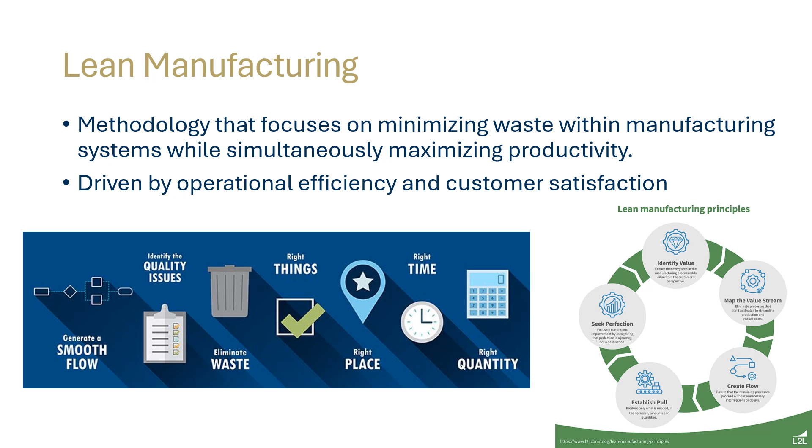The first topic is lean manufacturing, which is a methodology for both business and industry that focuses on minimizing waste within manufacturing systems while simultaneously maximizing productivity. This is driven by operational efficiency and customer satisfaction. Basically, how can we be as efficient as possible and provide as much customer satisfaction? This goes into principles of figuring out what is valuable, how can we get the value, how are we going to make that value flow as efficient as possible, figure out where to set those up to be efficient, and then continuously improve.

For applications, this can apply to any industry, especially in the business and manufacturing sector. I'll be focused on the manufacturing sector mostly. It goes into automation, the continuous improvement mentality, and flexibility. Basically, can we rotate as efficiently?

Then we'll go to production flow, because of how lean manufacturing works, there has to be a lot of controllers and advanced systems to maximize the efficiency. So it has to adjust its flow to maximize how effective it is per section. And then supplier relationships - are we going to have a port nearby? Are you going to be able to ship them efficiently and effectively and cost effectively?

One easy example of that is a car manufacturing plant where they actually roll down the vehicle being made on an assembly line, and a lot of that is automated or assisted where it's always moving, so it's always keeping this production flow going and moving at all times.

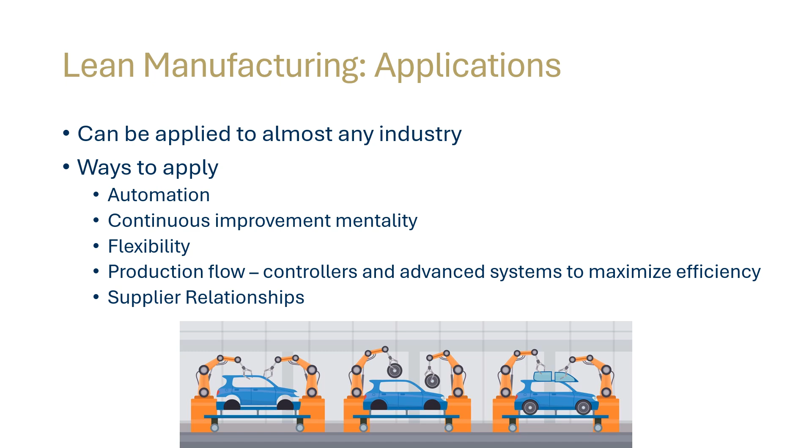Some of the capabilities or pros of lean manufacturing: it reduces lead times, it reduces operating costs, it improves product quality, and it simplifies process or tools.

One of the main parts of lean manufacturing is, well, you're leaning out the manufacturing. How little parts, resources, people do you need? How efficient can you make the process of manufacturing? So your goal is to use as little as possible.

However, that also comes with problems in the future where you could hinder future development because you might not have tools to change a lot, or you have small error margins because you don't have all these extra fail safes due to having a lean and not as robust manufacturing process. So your failures could stop the entire system, and it could really slow the assembly line when the manufacturing breaks down, like a tool breaks or something like that.

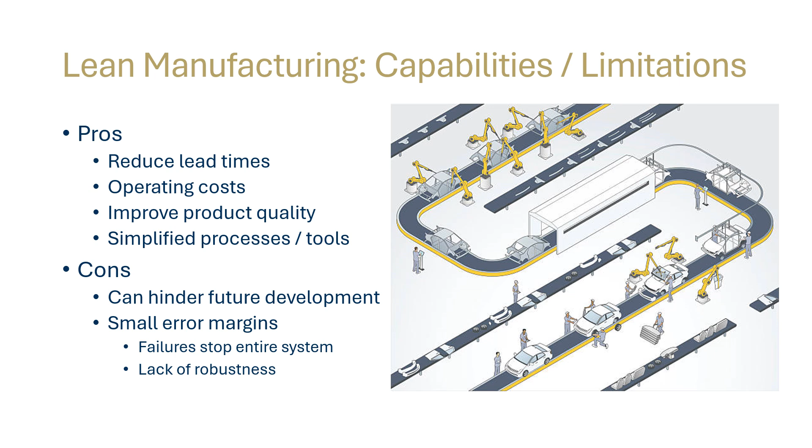Why I like lean manufacturing is it really reminds me of this game I play that's all about efficiency and maximizing resources, resource management. It's a fun game, but it's a lot about how you're going to gather these resources, how you're going to ship it to a place that's going to manufacture it as effectively as possible to complete the end goal of manufacturing. It's not about selling it, but it's a lot about resource management, how you're going to move it, and operating times. That kind of got me into engineering, and the lean manufacturing idea really resonated with the same reason why I enjoyed this game.

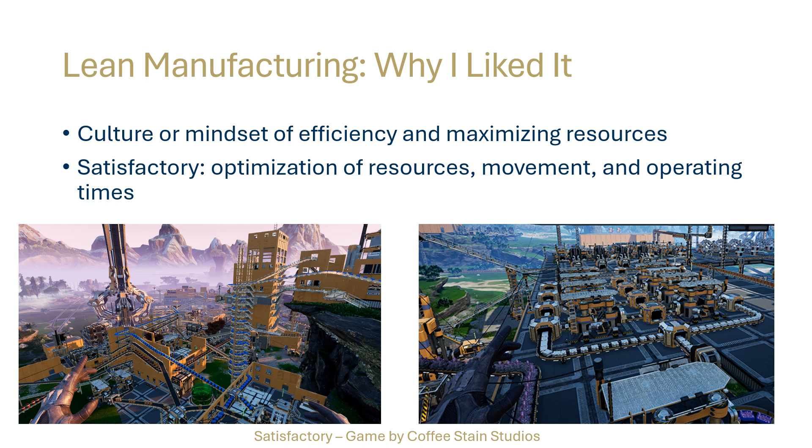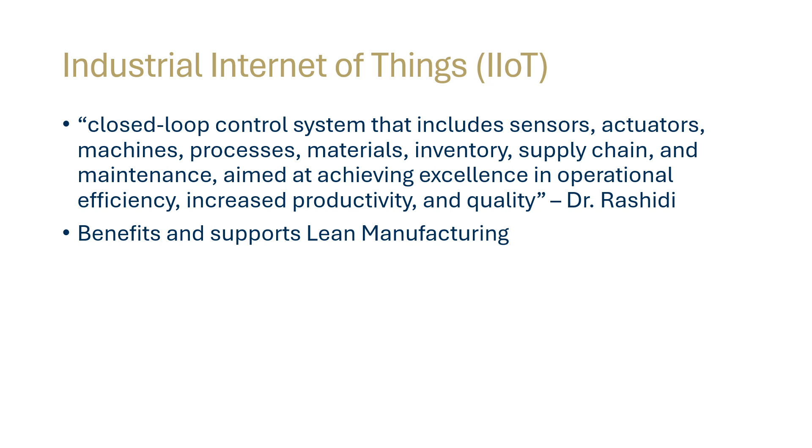A good segue from lean manufacturing is the industrial Internet of Things, IIoT, and it pretty much supports and benefits lean manufacturing, so it's not too far off. It's a closed loop system that basically includes sensors and a bunch of other machines, process, materials, supply chain maintenance, all about just increasing the operational efficiency and productivity, quality of the manufacturing system.

The biggest application of the industrial Internet of Things is just automation, and this includes at the plant and out of the plant. This is the entire product life cycle of almost anything being manufactured that could benefit from this. Basically, ground to raw materials all the way up to the customer can be optimized.

That's why industrial engineering is such a big field right now - it's all about optimizing from where the resource is going to the plant, to how efficiently the plant moves it, to how efficiently you can deliver it, and all this stuff that allows you to just be efficient from start to finish.

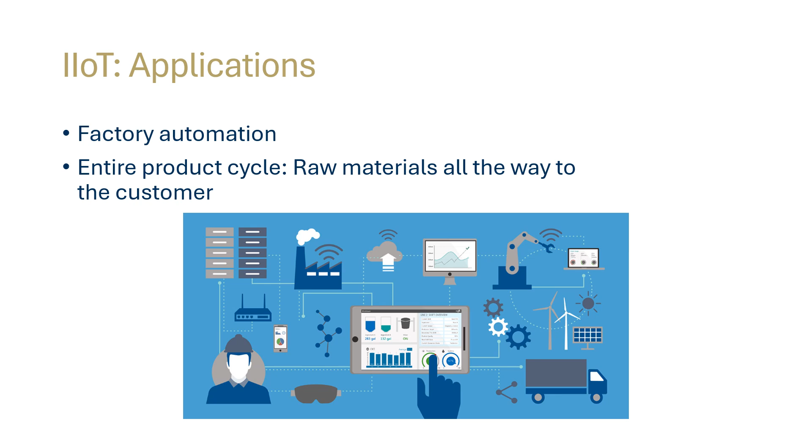For capabilities and limitations, capabilities are using the industrial Internet of Things, basically hooking up to the cloud. You have real-time monitoring, data collection, analysis, decision making. It can predict maintenance because it's watching how much it does. So if you're running it, you basically have to set up an algorithm like every 100 hours this tool will probably need to be replaced. Then you can maintain it before something breaks.

So instead of the whole line failing because a part broke already, you're just swapping it. This also bleeds into automation, where it allows you to run continuously. And then also, because of automation, you're allowed to do remote control, which means you can do lights-out conditions where basically there's no people there or very limited, just a skeleton crew to keep it running. Or you can have manufacturing in hazardous or dangerous conditions that humans would not be able to easily perform in.

Some limitations of the industrial Internet of Things is cyber attack risks. Some of the dams and systems are always under attack. I think one of the dams in the West gets almost 100,000 cyber attacks a day. So there's a lot of risks. If that fails, it could cause a lot of problems.

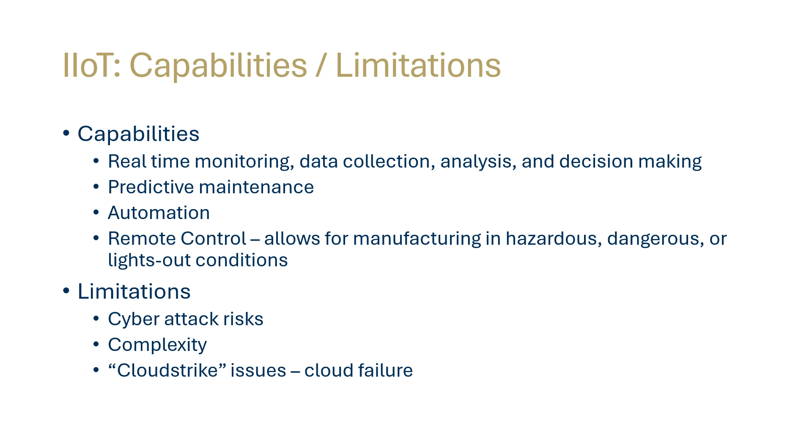Same reason I like lean manufacturing. I really like Satisfactory. I'm not going to go too much into that.

So the next thing is virtual twins, which is actually pretty similar to the first two. We're not moving too far off, but it's basically virtual replicas of physical assets, processes, or systems that use real-time data to simulate, analyze, and predict behaviors in digital space.

Lean manufacturing heavily relies on virtual twins for modeling and simulation of plants and factory automation. But virtual twins also includes CAD, computer aided design, and a lot more of the design process, not just the automation process.

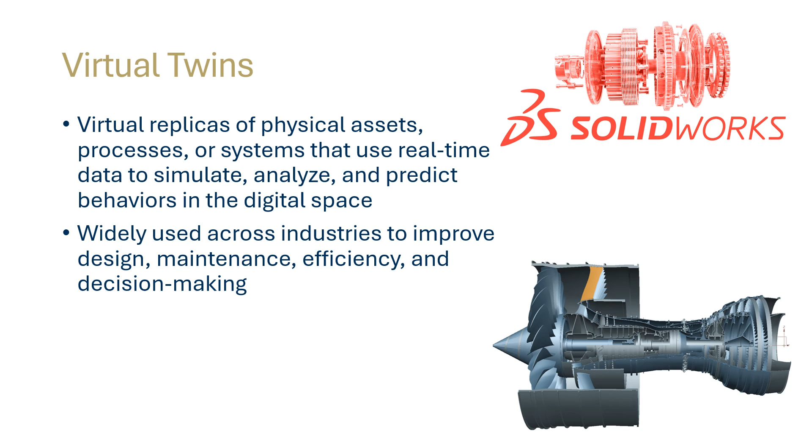But it's used across almost everything: design, maintenance, efficiency, and decision making. CAD's one of the biggest ones, but you can do smart planning. Basically, it can help you route how much flow needs to go somewhere. It's very popular in HVAC, saying how much air do you need to get here, and it can calculate how big a pipe you need to send fluid across. It's really cool—for a factory line, it can model how long each thing will take and allow you to figure out how to set up your factory line.

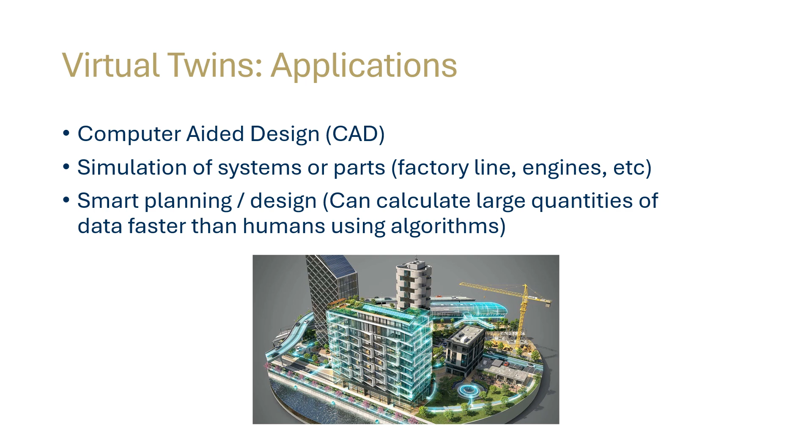So limitations though are a little bit different—basically it's data dependency. If you get wrong data, since it's an algorithm, it'll hurt the reliability of it, and it's also very complex, and with complexity comes costs.

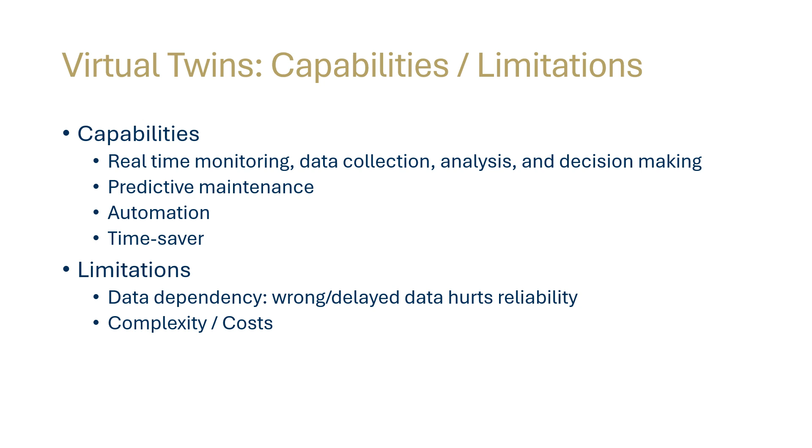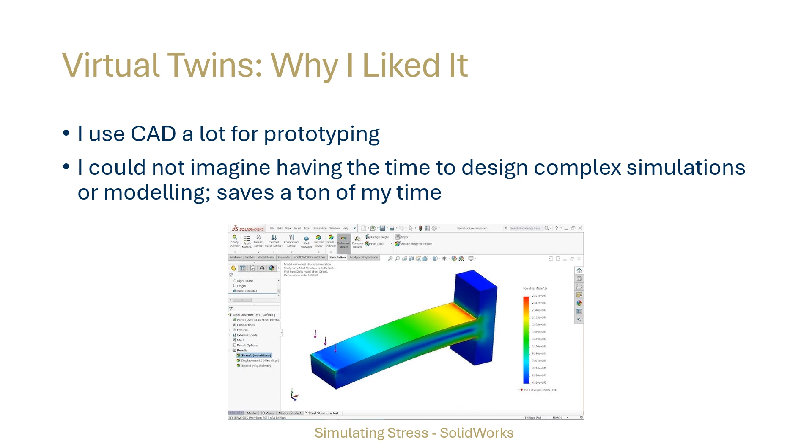So why I like virtual twins is I use CAD a lot for prototyping, and I could not imagine the amount of time it would take to design some of the complex simulations or modeling I've done. It would just be so much more work and hours put into something that I can easily ask the computer to simulate all the hard stuff.

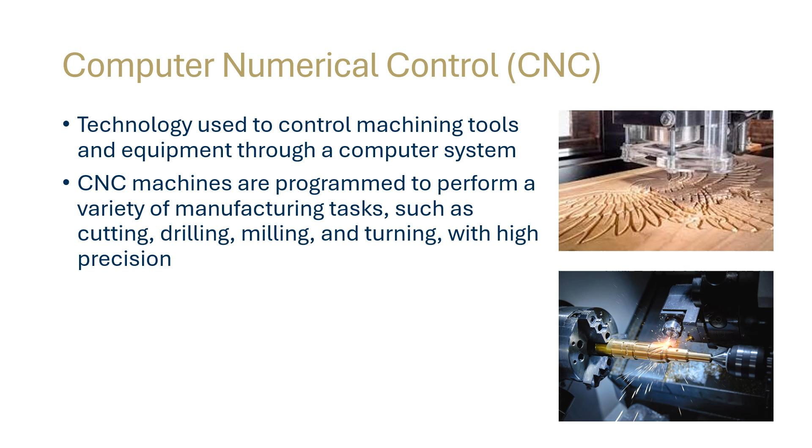So moving on to computer numerical control, or CNC as it's well known. Basically, it's technology used to control machining tools and equipment through a computer system and program to perform cutting, drilling, milling, turning tasks - basically simple manufacturing tasks with a very high precision rate, like to the thousandth of a millimeter or a thousandth of an inch.

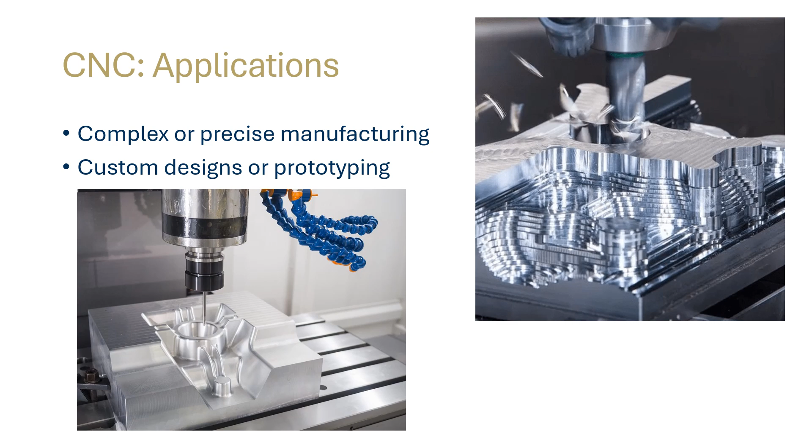The applications are complex or precise manufacturing - making very complex shapes that would not easily be made out of forging or casting. It's very precise, to a thousandth of an inch or even more precise. This is also great for custom designs or prototyping, especially used in space and aeronautical work where they need very high precision, exact shapes, and very irregular shapes as well.

These are very popular. Its capabilities are high precision, accuracy, it can be automated, it's efficient - it can make perfect efficiency since it can see its path and follow the perfect path to cut it. It can cut complex geometries and it's very repeatable because you just hit restart on the same block of metal and it works on multiple materials: metal, wood, plastic, etc.

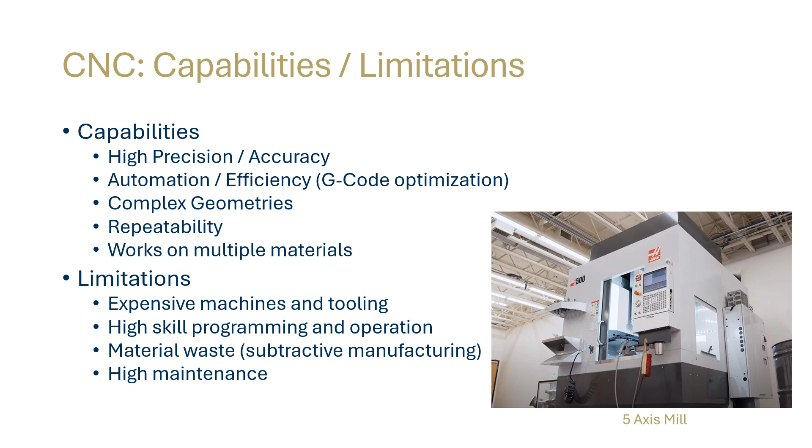Limitations are that it's very expensive machining, the tools are expensive, maintenance is expensive, and it takes a lot of high skill to program and operate them. There's also material waste since it's a subtractive manufacturing process, so there's a lot of waste that comes with that.

I like it because the precision and using machines to make perfect fits is super cool. There are zero tolerance cubes and stuff that show just how precise you can truly make these. I also like cars and planes a lot, and there's a lot of CNC involved - it's really cool to see how things are made and I really like seeing how that works.

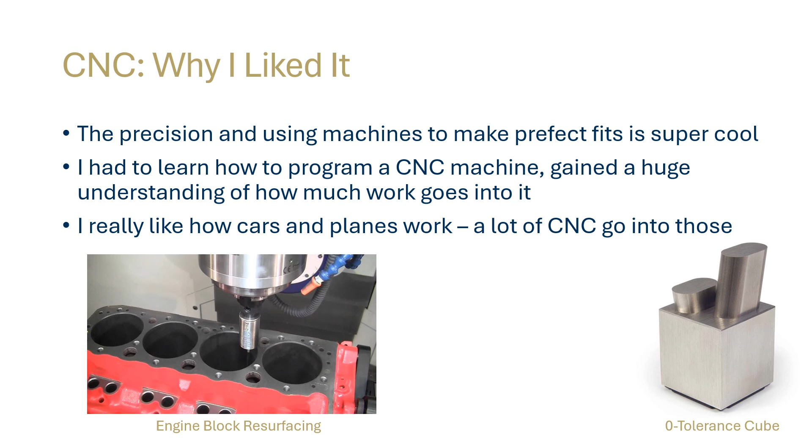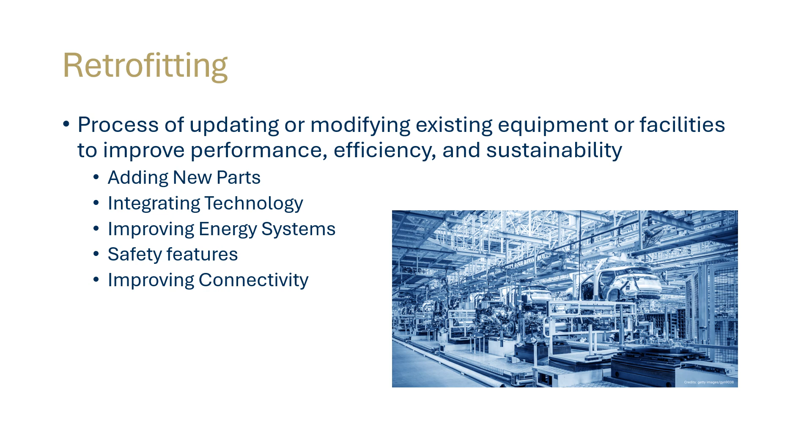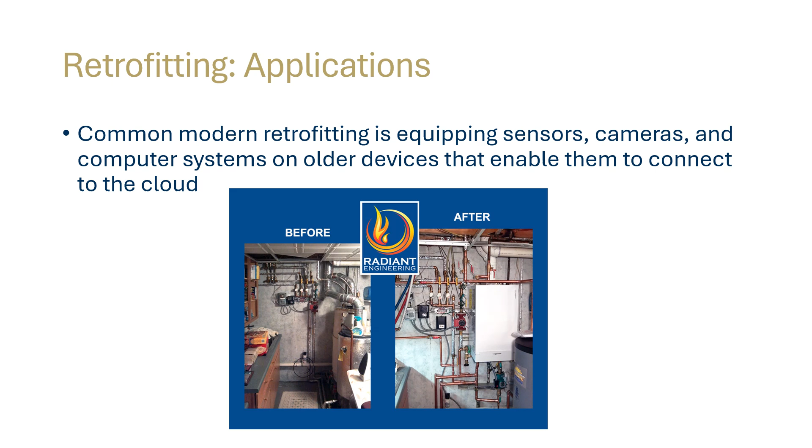A lot of companies are trying to implement virtual twins and the industrial internet of things, which allows it to connect to the cloud and be automated. The application is equipping sensors, cameras, and computer systems that enable them to connect to the cloud, and those computer systems allow them to be modified for maximum efficiency using some of the previous topics we discussed.

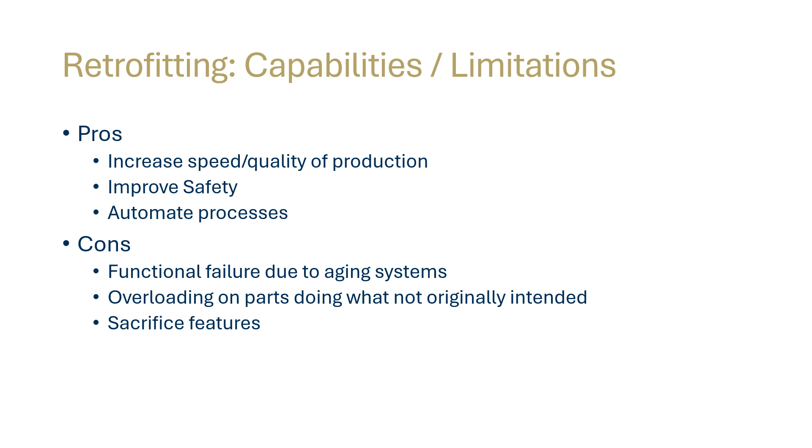Pros: it increases speed, quality, and efficiency of production, and can improve safety by allowing for automation. Cons of retrofitting are that there are a lot of functional failures with aging systems, and you could be overloading parts that aren't doing what they were originally intended to do, which can also sacrifice features. For example, if you have a newer, more powerful radar, it might take more space, meaning you'd have to cut material or another electronic component out to make room for that giant radar.

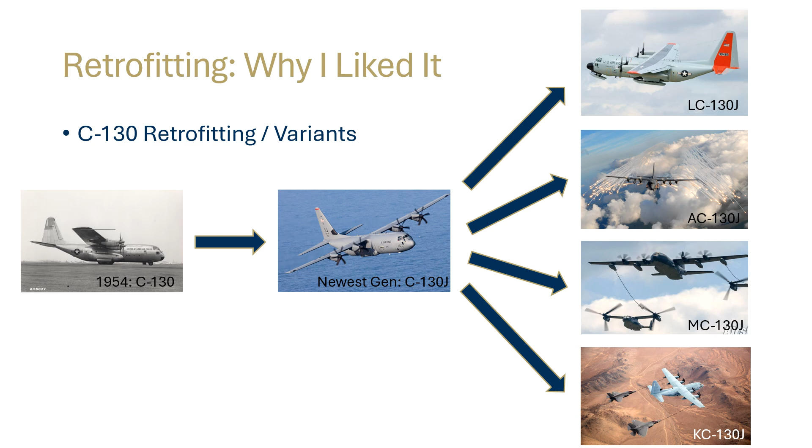In conclusion, I went over all the topics like lean manufacturing, industrial Internet of Things, virtual twins, CNC, and retrofitting, and I went over the resources I used. That concludes my presentation - thank you and have a great night.